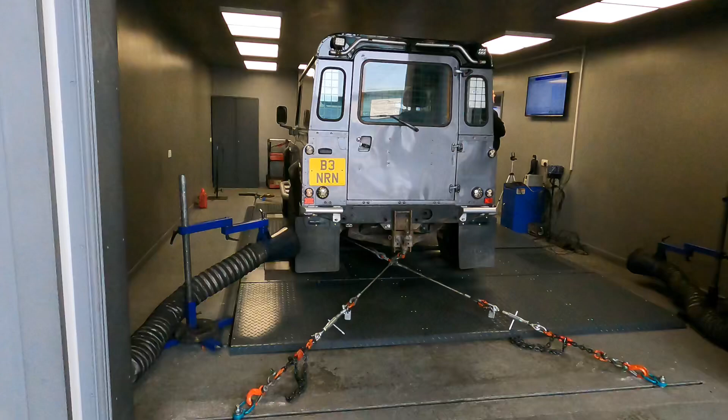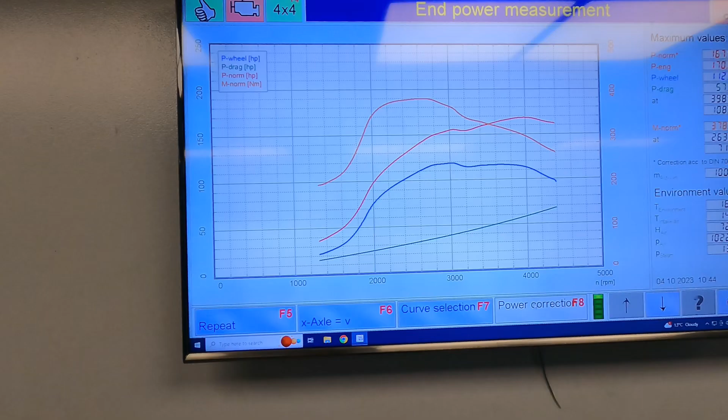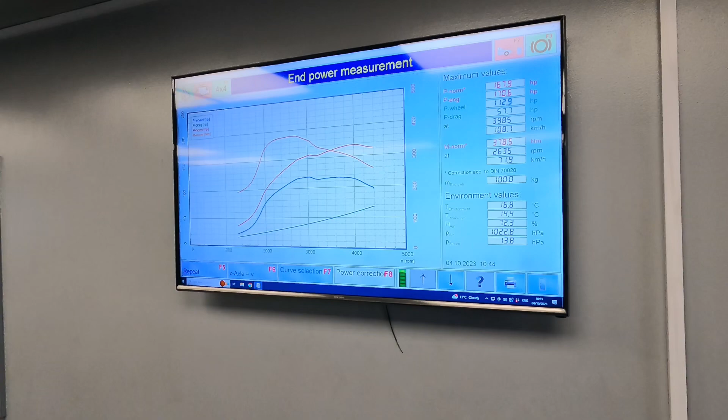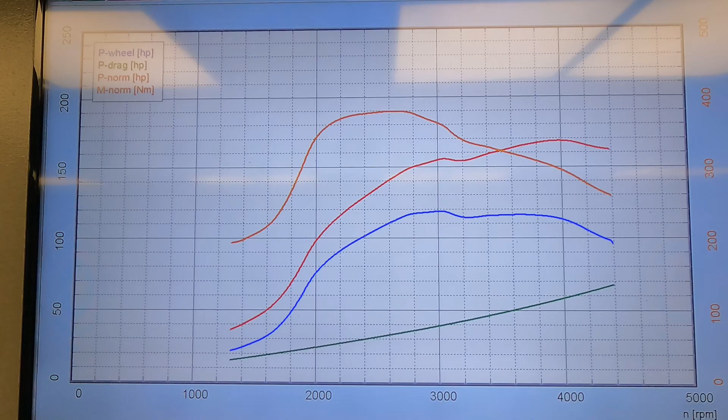So we've got an interesting one on the dyno today. It's a Td5 with a tune that's over 20 years old, one that we mapped 20 years ago. And look what it's made, 167 horsepower and 378 newtons of torque. And the delivery is, it's not perfect, it's not a perfect curve, but I think for all those years ago, I think well done really.

And it's coming today. Lovely little Defender 90 Td5. Customer's owned this since forever basically. And we're going to do some improvements on it. So I just had a brief catch up with the customer just to double check we've got the spec right for the vehicle. So it's a 15P engine with a Britpart intercooler, standard air filter.

So we're looking to extract some more performance from this one today. But also we want to keep the emissions nice and clean. This one does smoke a little bit, but I think we can make more power than this, but with cleaner emissions, essentially less smoke from the exhaust.

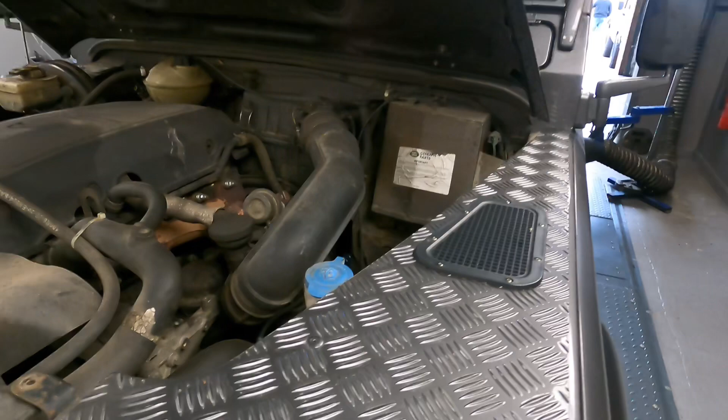So before the remap is burnt to the ECU, reflashed to the ECU, what we want to do is add a little bit more boost, and the way to do that on a Td5 is to add some preload to the actuator, which is here.

Basically what we'd do is we would shorten off this rod here by adding some preload, and by adding preload it stops the wastegate from opening so soon and increases boost. So we only want to increase a little bit, so we'll start off perhaps by reducing the threads on that actuator arm there by around 2 threads.

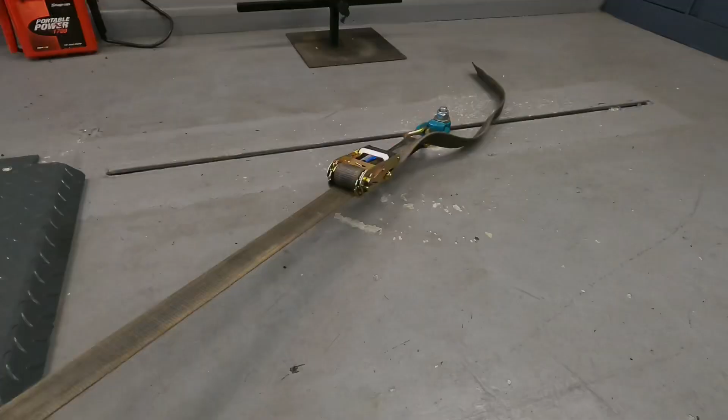So just essentially a small display of how we strap the vehicles to the dyno. A lot of people often ask, how do you secure the vehicle on the dyno? How does it just sit there? Well, it's strapped there, and we basically latch onto the axles. We have some adjustment on the floor here to be able to go to the chassis. Obviously, we run all different types of vehicles on the dyno, and this just gives us a bit more room.

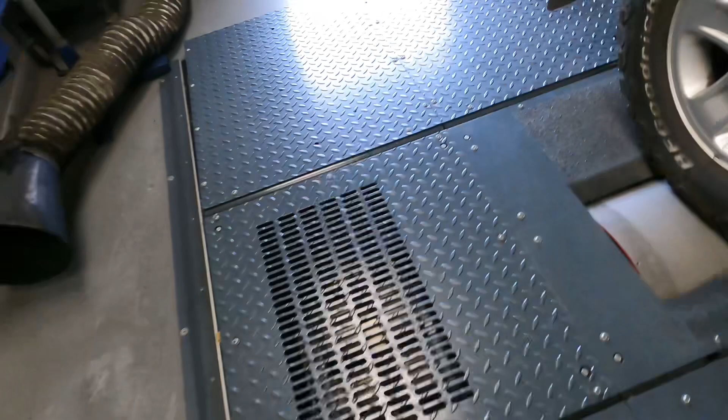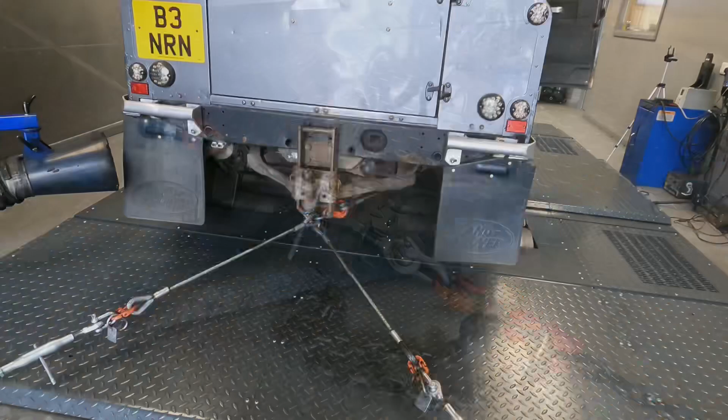The rear of the vehicle. Essentially, this is how the vehicles are strapped on, secured, and the extraction for the exhaust is up outside the premises.

So we now have a remap flashed to the ECU, and we just started up the engine, and we're going to go ahead and warm up the engine before we get ready for power testing. So when we are power testing, we actually use an Nanocom for logging the engine data. It tells us all of the temperatures, pressures and values.

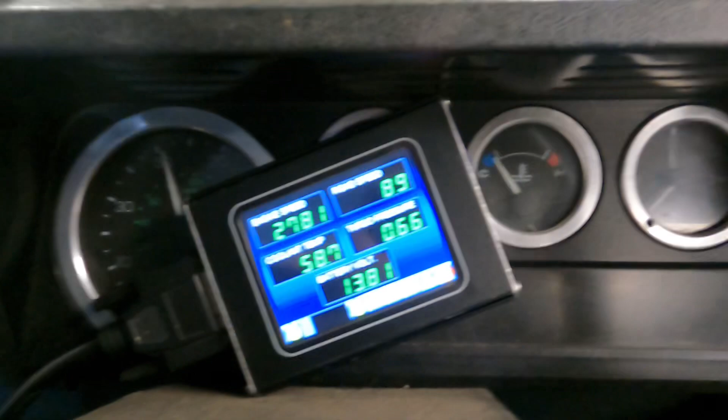So that's a strange one. Yeah, the vehicle just cut out essentially. The customer tells me that it does this sometimes. So having looked at the codes on the ECU, there's some for noisy crank and I think it was injectors 1, 2 and 5 open circuit.

We'll try again, but it could be the vehicle needs a harness, or it could be one of a million things. It's a motor vehicle. So do another pull now. Vehicle's still got some good temperature in it.

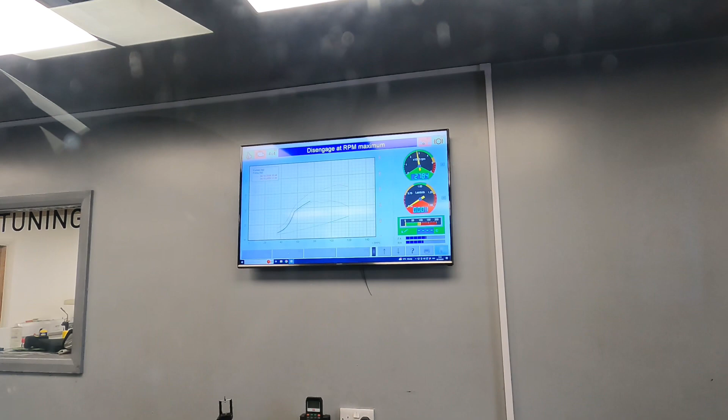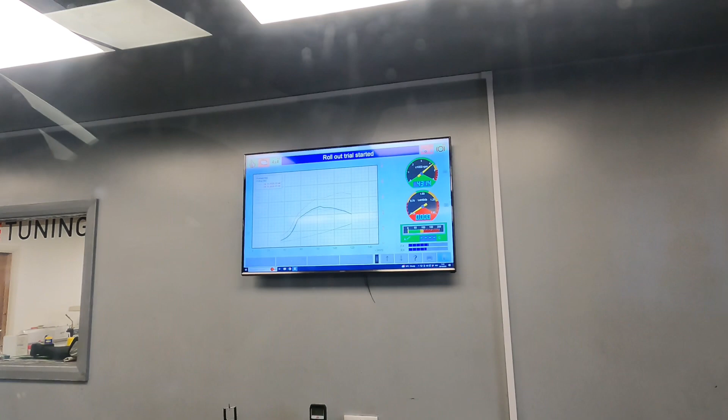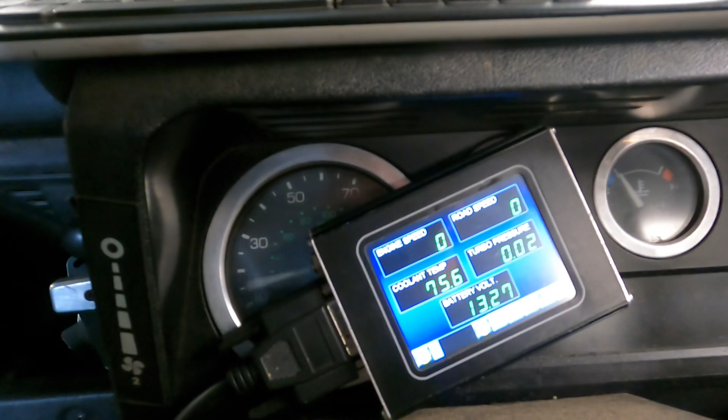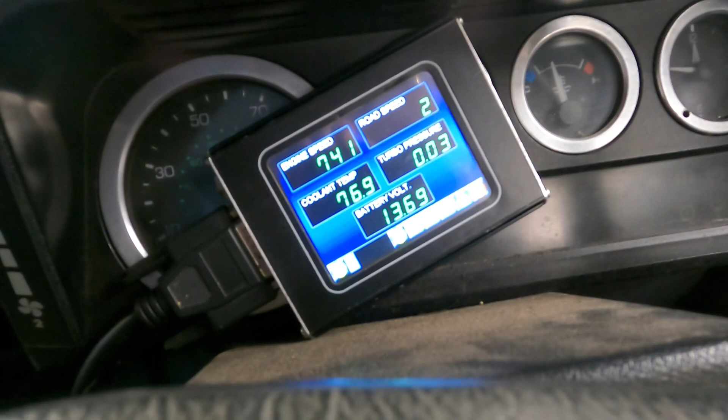Cut out. So what I saw at the top of the rev range, just after about 4,200, was that before the engine cut out, the engine speed actually read 0 and then 2,000 and then it cut out. So what does that tell us? Potentially it's a crank signal fault, crank sensor fault. There was a code for noisy crank signal, so we'll have a look at that sensor. Quite a dirty crank sensor there, so we'll get that cleaned up, we'll have another go.

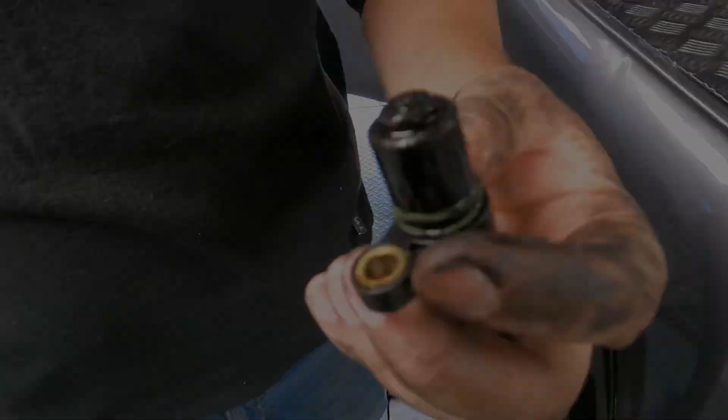So this is our second revision to the mapping, and we're just about to do another test to see if we can find some more power. Still really clean on the exhaust, so very ultra low emissions, nice and clean, no smoke. We're making more power. There we go, so wide open throttle now.

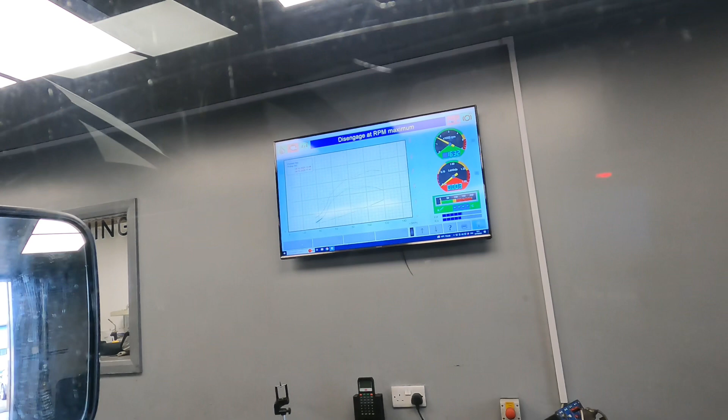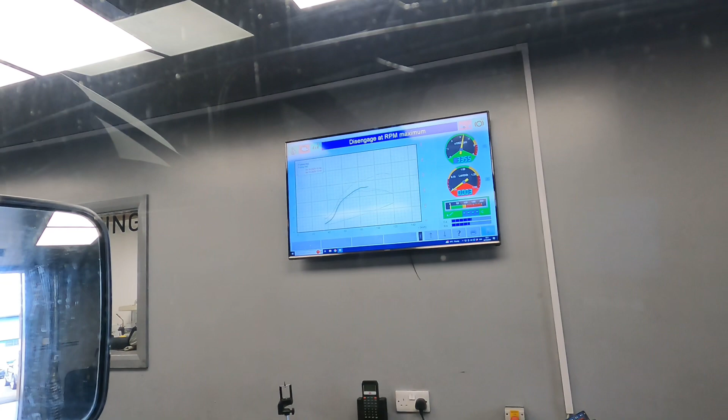Cut out again, engine's cut out completely. Cycle the ignition, it starts up. It's on a mission there as well. You're definitely going to see those improvements. So I've got another 1,000 RPM to go and we've already found a good chunk of horsepower.

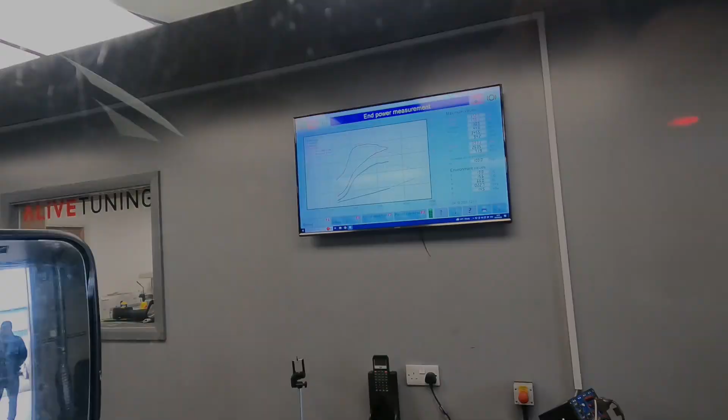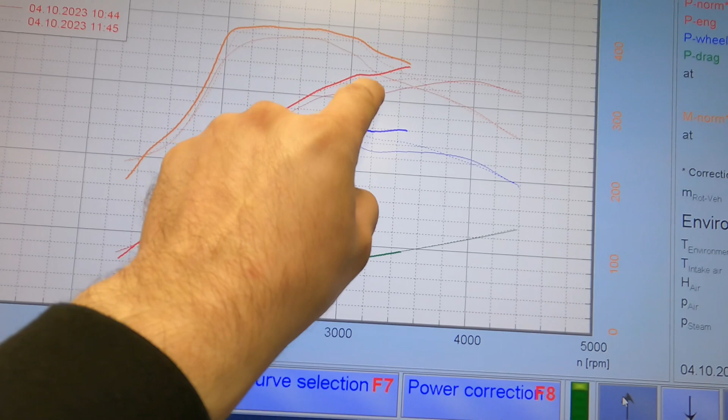Yeah, so we've got the faults with the crank sensor at the minute, which Will's just swapping out for a genuine crank sensor. But as you can see, these bold lines here, this is horsepower, and the two dotted lines. The thin line here is what it came in with. The dotted line is our earlier revision. As you can see, we're on a mission here to make some more horsepower.

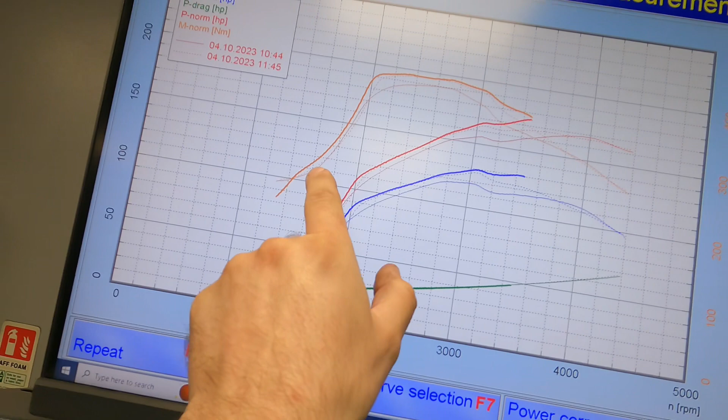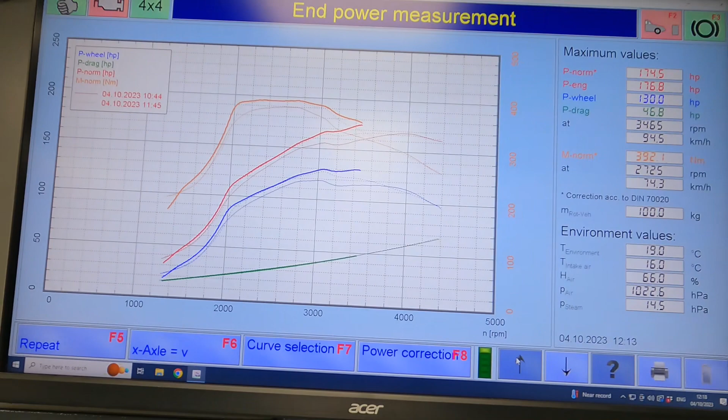We're up to 174 horsepower, and as you can see, improvements in the torque, more from the word go, and an awful lot of torque here gained, and it's holding in stronger as well. So hopefully we can figure out this crank sensor fault, or this engine cutting out fault, and we can prove some healthy results later. It's looking like it could be around 180 horsepower.

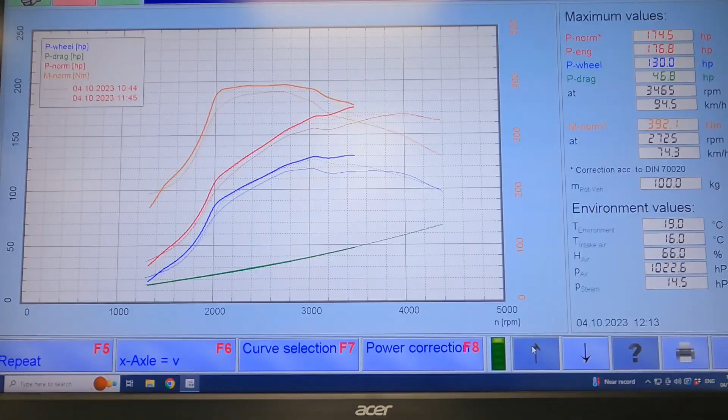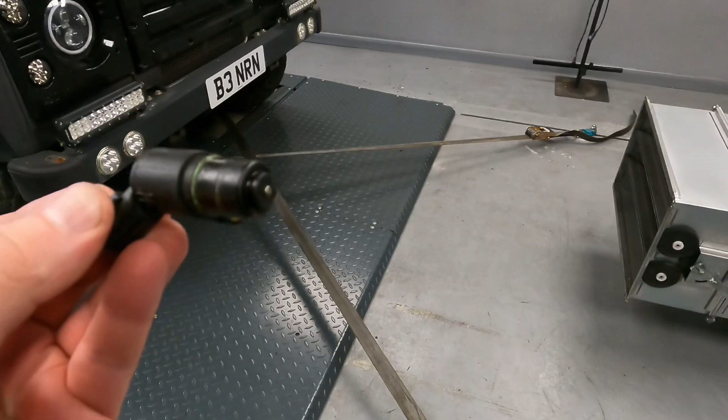So what we found earlier on was that a non-genuine crank sensor was giving us some problems in the higher RPM, in the higher rev range, and we swapped out to a genuine one, a used genuine spare one that we had in the workshop, and this little 90 is now behaving itself quite well. So one new crank sensor later, genuine one, and we're back up and running. So let's have a pull with the new revision.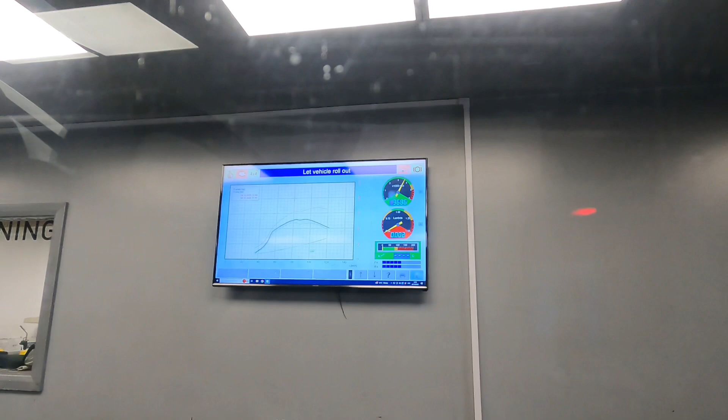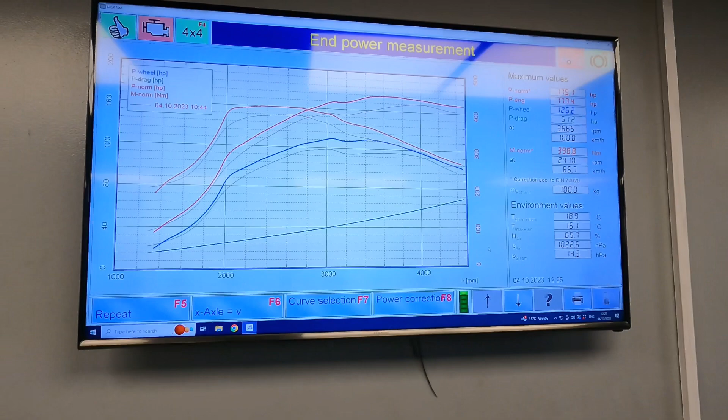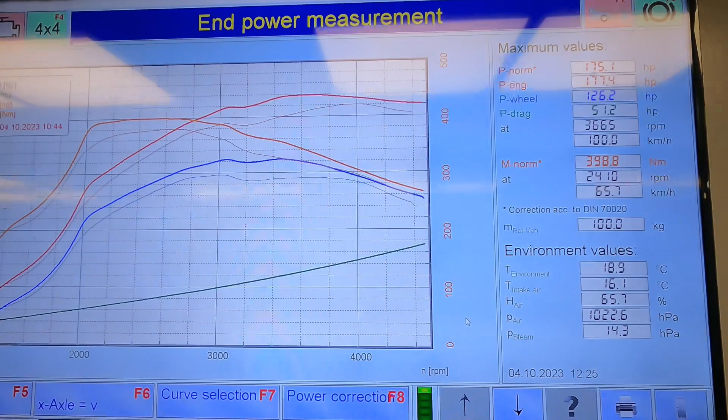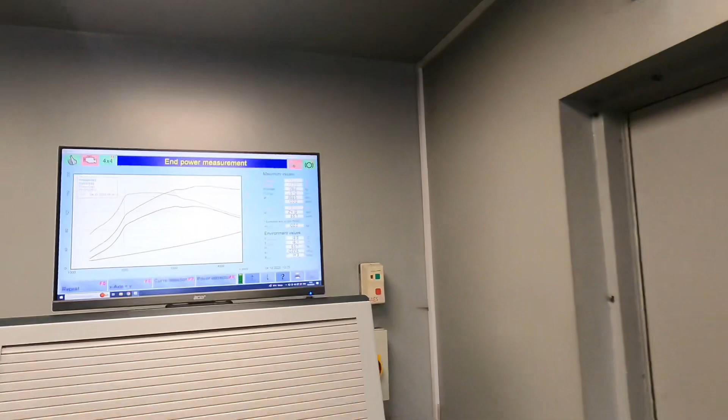So yeah, just finished power testing after a couple of revisions of the map file there. We've ended up with 175, just under 400 newtons of torque. So what you're looking at there is the current mapping, and also what it came in with in the background. So there's an overlay there essentially. Another screen here with potentially better.

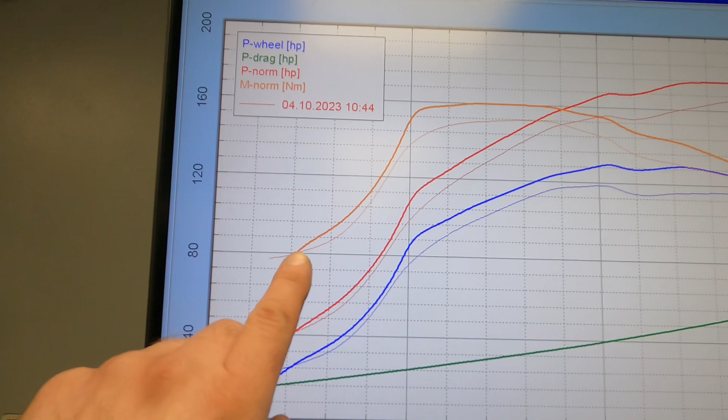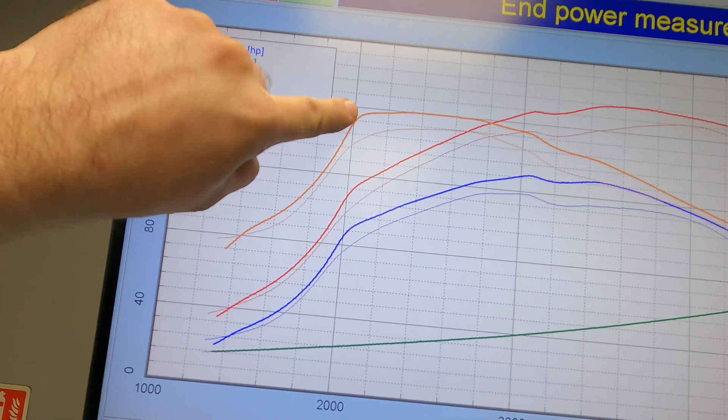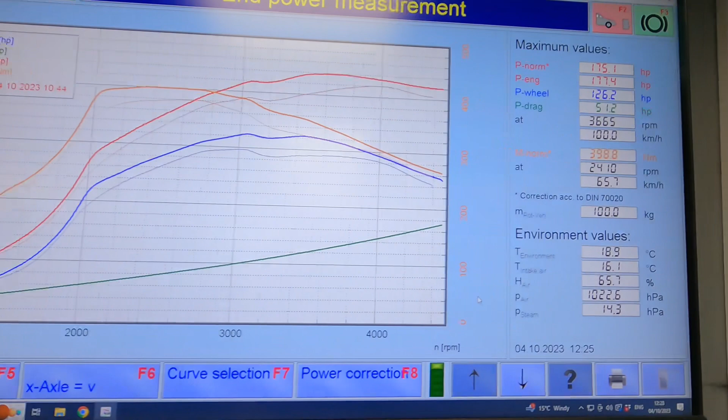So from the start of the pull, we've got gains in horsepower and torque, right from the word go, from the moment we press the throttle, all the way throughout. So much stronger on the torque, which holds an awful lot longer as well. And we're all looking forward to a road test with this one, let's put it that way. So those figures again, 175 and 400.

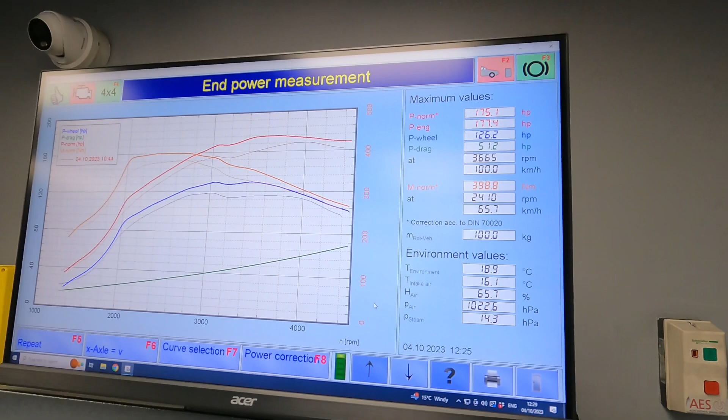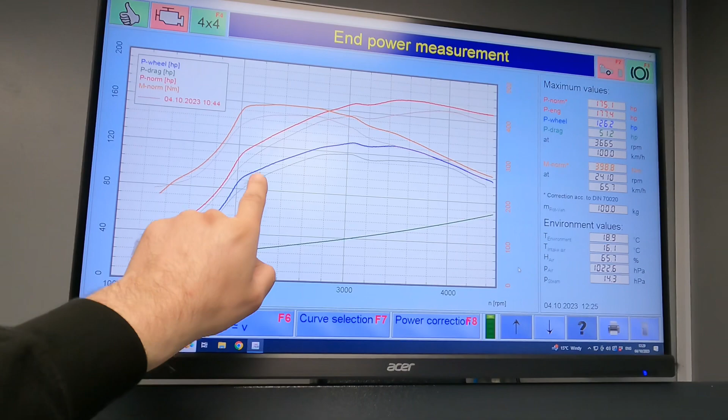So for those that are looking at these graphs and are not sure what exactly is what, you've got red, brake horsepower, orange is torque, blue is power at the wheels. Being a chassis dyno, the only part of the vehicle that's actually connected to the dyno is the tyre, so we measure power at the wheels.

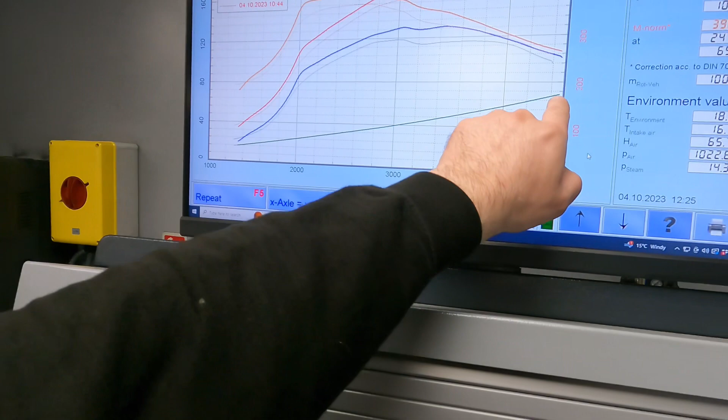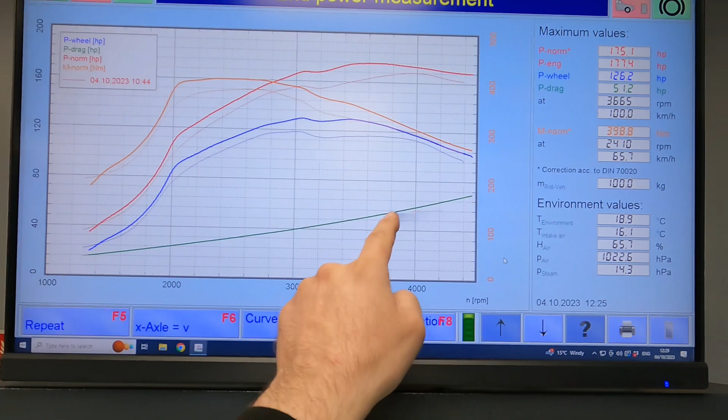We then measure the drag from the vehicle, which is measured from the point where we finish the power test and we coast down. The vehicle measures losses, and our losses are applied to wheel horsepower, which gives you your brake horsepower.

Just to summarise on the vehicle we've had on the dyno today, we've found 20 newton metres of torque as a peak value and 10 horsepower. But most importantly, we're cleaner on the emissions. And what I actually mean by emissions is less smoke, an awful lot less smoke. So that's what we're aiming to do.